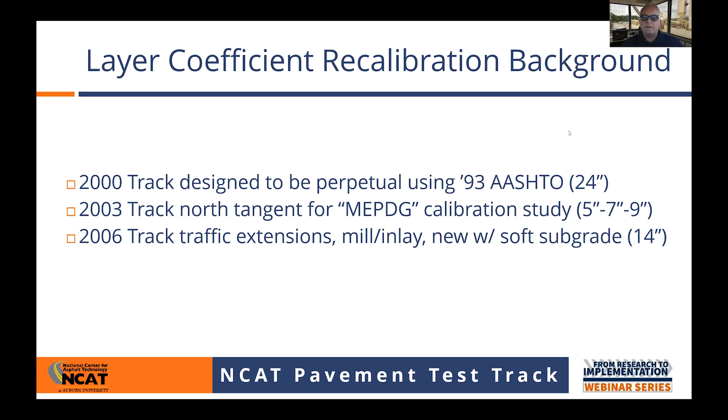In 2006, we did some traffic extensions in some of those sections from the '03 track. We did some mill and inlay sections, and then we also added a couple of soft subgrade sections, a 10-inch section and a 14-inch section that I think Dave is going to include in his comments for today.

In 2009, we did what we call the group experiment, where we did 50% RAP sections compared to virgin sections, warm mix asphalt, and a highly polymer modified binder.

Essentially what we learned over the course of building all these test sections was that, although the track was designed to be perpetual using the 93 AASHTO design guide and the layer coefficients in play at the time, 9 inches of thickness we later learned provided perpetual performance. Later, with innovative material like highly polymer modified binder, 5 and 3/4 inches provided what we believe to be perpetual pavement performance. So there's a lot of room for improvement and still be conservative with pavement thickness design.

And Dave, I'm going to hand off to you there so that you can get into the weeds on the research we've done with layer coefficients. And I got to figure out how to stop my share.

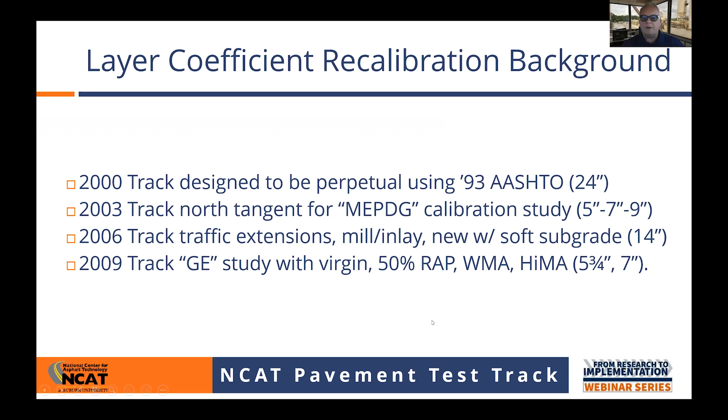All right, thank you, Buzz. Hopefully, Buzz, can you hear me? Yes, sir. All right, very good. I've got my slides up, so I think we're good here. I just got to rearrange a few other things.

Good morning, everybody. Thank you for being here. We appreciate your time and attention this morning. Buzz did a great job of setting me up for what I'll be talking about, which is recalibrating the asphalt layer coefficient, specifically at the NCAT test track.

And then I'll hand off to Kim to talk about similar but different work that was done in Washington State to achieve the same objective, which was to update how we go about designing asphalt pavements with the older 93 AASHTO design guide.

Many states — I think currently over half of the U.S. state DOTs — currently use the AASHTO 93 design guide, even though we have the new MEPDG and the AASHTOware Pavement ME software and so on. Most states are continuing to use the old AASHTO 93 design guide for a number of reasons I don't have time to go into here, but it's still very prevalent and commonly used. Even states using the newer design system are oftentimes also using the AASHTO 93. As part of that, the structure coefficients, what we call these A-sub-i terms, are key inputs.

This is how we express the relative strength of the various layers. I'm going to focus today on structure coefficient of asphalt concrete, but it's how we express the relative strength of the base, sub-base, and so on, all the various materials that we might put into a flexible pavement structure. And it's really important because the structure coefficients are how we get to layer thicknesses.

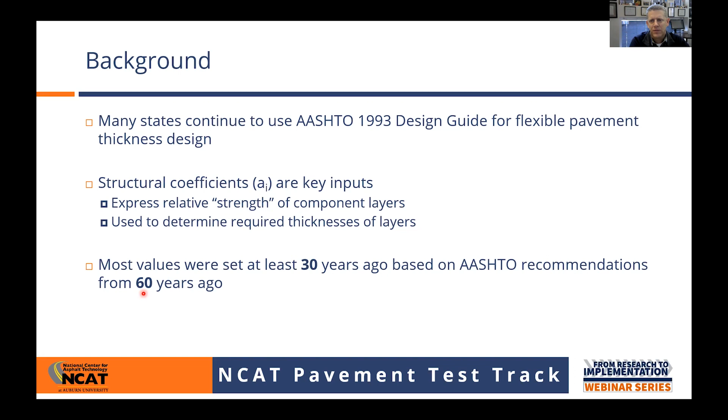Hopefully we would all agree that there's been at least a few improvements in how we specify and engineer our binders, our materials, and mix design and construction, all that kind of rolled together. When we use really old values from the 1960s, we're saying, well, forget about all that. We're just going to attribute the strength of the material to what was going on in the 1960s, as opposed to what we currently have in terms of our material design and engineering today.

So just a quick review for those that are unfamiliar with how structural coefficients work in pavement design. If we think about a pavement structure, we have, for example, asphalt concrete over aggregate base, maybe an aggregate subbase over the subgrade. Based on whatever the materials are, and say the modulus of the materials and other properties that we can characterize, we can quantify the structural coefficients, what we call A1 for layer 1, structural coefficient layer 2 and 3. We also may have a drainage coefficient assigned to each of these underlying base and subbase layers.

Through the AASHTO 93 design process, we can compute the structural number that is required above each layer to protect it. So in a design like this, we would have SN1, SN2, and SN3, and we would design it in a top-down fashion to come up with what the layer thicknesses ought to be.

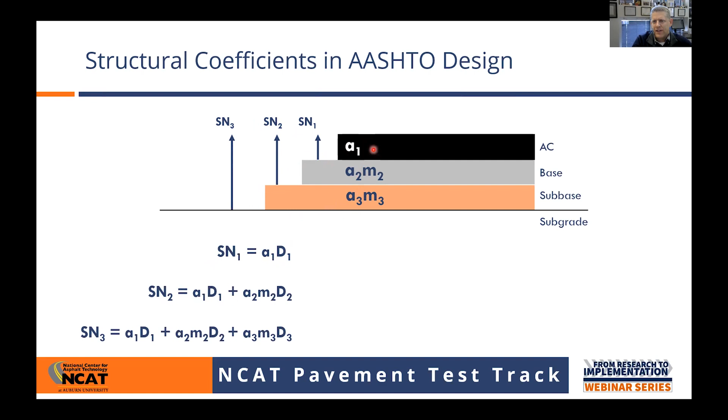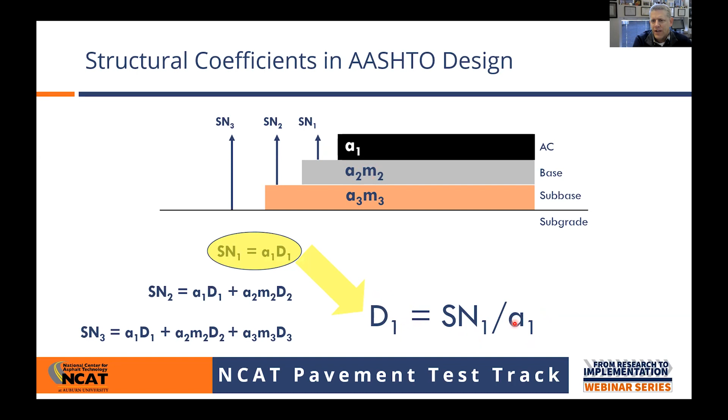For example, SN1 is just the product of A1 of that material times the thickness of the material. SN2 is the sum of these two layers, and then SN3 is all three together. So once we figure out what the required SNs are, we just have to back solve for the thickness. So for example, this equation, if I know what SN is required to protect the base layer, I just take SN1 divided by A1, and that provides the required layer thickness. So these structural coefficients are just critically important to how we go about coming up with the thickness of all of the layers, and the focus today is on the asphalt concrete.

So where do those SNs come from? Where do each of these SN1, 2, and 3 come from? Well, they come from this medieval torture device, the so-called AASHTO structural design equation. It's very complicated, and you can find nomographs like this to solve it in various textbooks and the AASHTO 93 design guide. It's a big empirical equation, and I'll break it down a little bit and talk about how we go about solving it, or the importance of the various parameters.

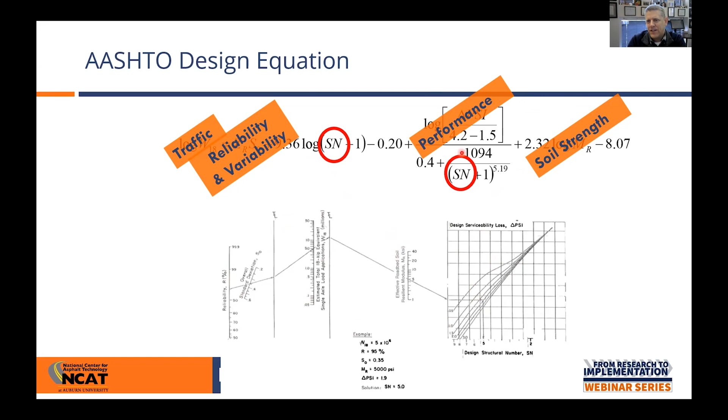Basically, if we characterize 5 inputs, and that includes the traffic, the reliability and variability, the performance expectation, and the soil modulus, those 5 inputs, we can then solve the equation for SN, and that's how we get to SN1, SN2, and SN3. One of the practical problems in using this equation is solving it for SN algebraically is nearly impossible. So what we have are nomographs like this, or we can program it into a spreadsheet and solve it numerically. But the point is, we put all this stuff into the equation, and what pops out is the required structural number.

And I think it's instructive to go back and look at or think about the AASHO road test that was held in the 1950s. These pictures were published in 1962. Before TRB was TRB, it was called the Highway Research Board.

These were published in the 1960s, showing some of the things going on at the AASHO road test. What's really interesting is when you look at the data that came out of that road test, they had structural coefficients ranging from 0.33 up to 0.83. These are average values representing that test loop and how many sections were in the loop, and the corresponding R squared. But it's really interesting that the values range from 0.33 to 0.83.

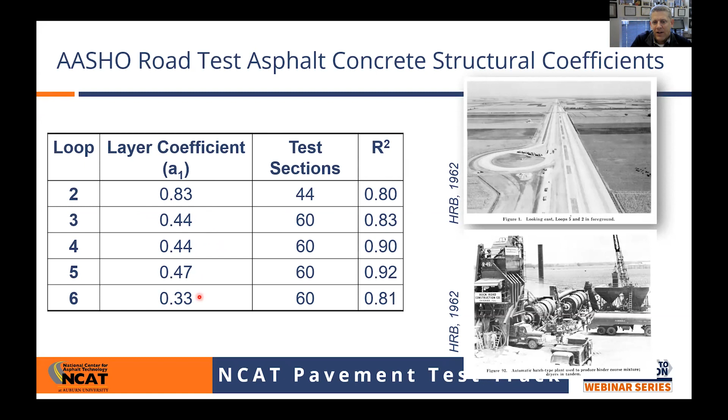There were 2 loops that came out at 0.44, and AASHO at that time decided they would recommend 0.44. As far as I can tell, reading between the lines, that is how we arrived at 0.44 virtually across the entire country. AASHTO said 0.44 is a representative number, and then it just migrated out to most every state. But the range of values was really from 0.33 up to 0.83.

And then there's two states, Alabama and Washington, and we're presenting about this today. Kim's going to talk about what's going on in Washington State, now using more than 0.44. That may be the first time in history that Alabama and Washington State were ever mentioned in the same sentence about some engineering technology. So we're in the same boat here, using above 0.44, and we're going to talk about how we got there and what the impact is on our pavement designs. Virtually the rest of the country, those using empirical design, are using 0.44 or below.

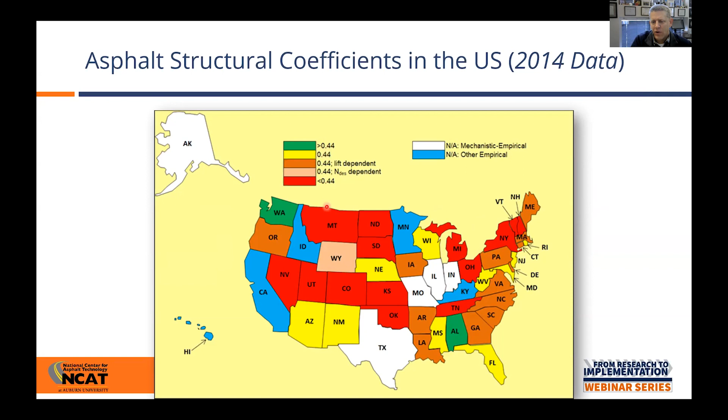Given the things I've talked about already and the new advances we've had in asphalt binder and mixture technology - if you think about the AASHTO road test, that was even pre-Marshall mix design, definitely pre-superpave. Marshall mix design didn't even exist yet. This was before we had SMAs and polymer modification, all the high-tech stuff and innovation that we find in the asphalt industry, which really didn't exist in the 1950s when those test sections were built.

So there's a need to update or recalibrate. We talk about updating, we're really talking about recalibrating the structural layer coefficient to reflect actual pavement performance. This report we wrote back in 2014, you can find it on the NCAT website. I've got a link at the end of my slides that goes through procedures. There's a variety of procedures you can go through to recalibrate, and I'm going to talk about one of them using our test track data today. But this document, if you're interested in getting into a lot more detail, is freely available on the NCAT website.

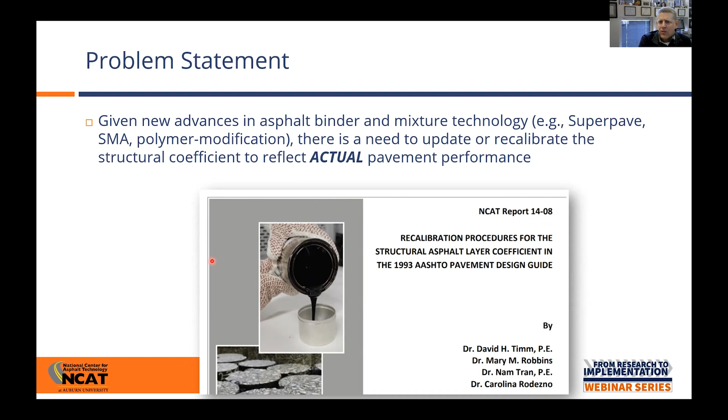The three different processes you can go through to recalibrate range from relatively simple to relatively complex. The first is using a deflection-based procedure. You go out to an existing test section, hit it with an FWD, do some back calculation, and then correlate the back calculated properties to structural coefficients using old regression equations that came out of the AASHTO road test. The problem with this approach is that it relies on those 1960s AASHTO correlations. This is probably the fastest and simplest way to do it, but it also doesn't provide you modern performance benefits in terms of the calibration process.

The process I'm going to talk about is performance-based procedures, where you recalibrate the structural coefficient to observed pavement performance. This is really closest to what was done during the AASHTO road test - how they came up with those values, the 0.33 to the 0.44, came out of the AASHTO road test by just calibrating the structural coefficients to observed performance. I'm going to focus on that, what we did at the test track. And then the more modern approach is to use mechanistic empirical based procedures.

And this is what Kim will be talking about, what was done in Washington State.

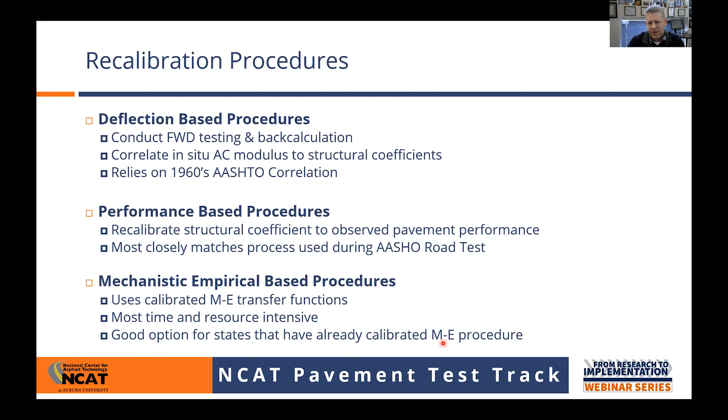Basically it uses calibrated ME transfer functions. It is the most time and resource intensive approach, but if your state is going through an ME implementation, at the same time you can go back and look at the existing performance of your pavement sections and calibrate using this more modern approach. It's a good option if you've already calibrated the ME procedure and have the necessary data, or if you're in the process of doing it, you can recalibrate the structural coefficient very quickly.

Buzz has already talked about the test track, so I'm not going to go into any more details other than to say that we really rely on this rapid application of traffic and weekly performance measurement to go through our calibration procedure.

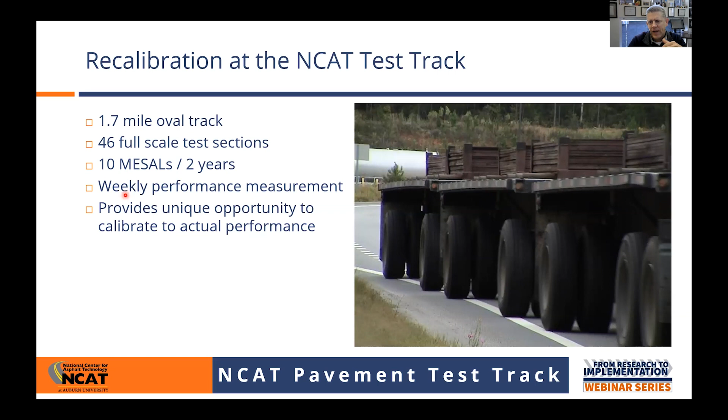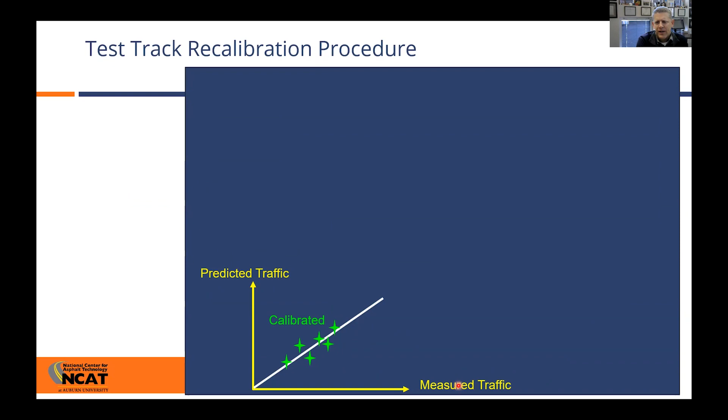The overall framework of how we recalibrated at the test track hinges on this idea that we have predicted traffic in terms of ESALs and then measured traffic. In an uncalibrated mode, you might not have a good match between those - there might be a bias in the data. In fact, this is what we found at the test track: we were able to apply a lot more traffic than what AASHTO 93 would predict using our existing structural coefficients. So the idea is you go through this calibration process and take the bias out of the data, same thing we do with calibrating ME transfer functions.

That begins with having actual traffic - knowing how many trucks, how heavy the axles are, and how many repetitions we have - and then actual performance, characterized by weekly IRI measurement on the sections at the track. We correlate that IRI through an equation to get a serviceability index, that 0 to 5 scale that AASHTO likes. From that, we get a terminal serviceability and a change in serviceability, important to the AASHTO equation. Then we're looking to come up with a new A1 that'll calibrate or take the bias and error out of our data set, and we can use that to calculate a structural number.

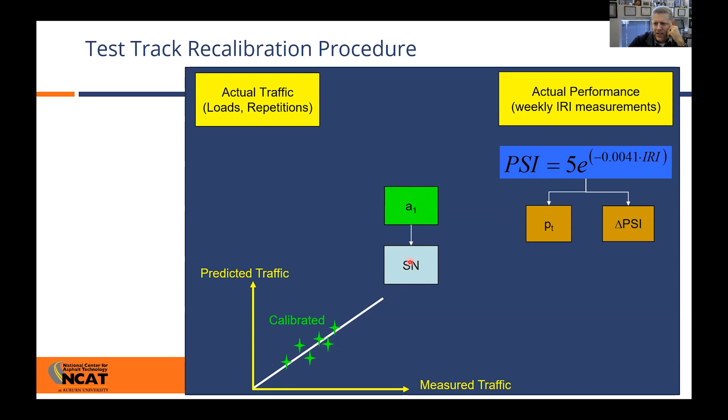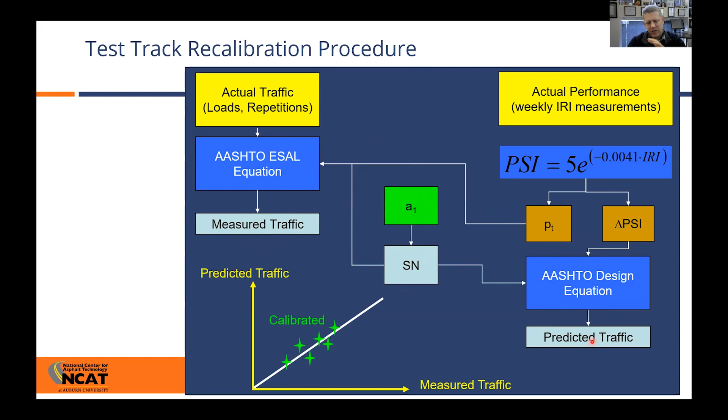That can feed into that long equation I showed earlier to give us the predicted traffic, the predicted log W18. There's another long equation used to calculate how many ESALs based on all this other stuff, and that's where we get our measured traffic. Then it's a matter of adjusting A1 to get a good match between measured and predicted traffic - we're just trying to calibrate that equation by adjusting A1.

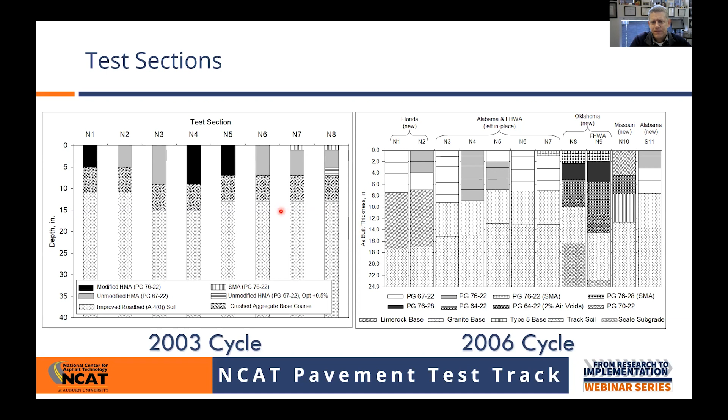This shows the sections used in our original calibration study. They span two different test cycles. I'm not going into all the details, except to say they had mostly the same kind of pavement foundation, though a couple sections had an imported foundation, a weaker subgrade, various aggregate base materials, various AC thicknesses, and various mix designs. It was a nice range of asphalt materials, representing what we'd call modern - although now it's 20 years old - definitely a lot more modern than the 1950s.

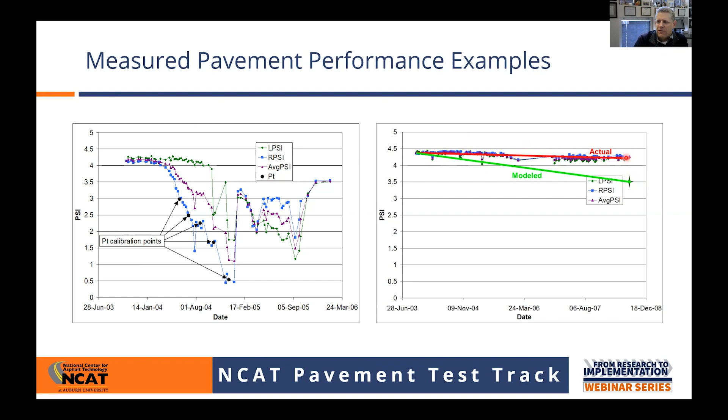What we did was convert the measured IRI to a PSI serviceability index on the 0 to 5 scale. This shows a couple examples. In some cases, we had a lot of pavement distress appear, so serviceability drops off, and we choose some calibration points. In other cases, we didn't have much change in serviceability. This red line is the actual, but to be conservative, we just chose a reasonably low value rather than the actual, since we couldn't calibrate without a change in pavement performance. So we chose that in some cases.

This is just showing some raw data. If we use 0.44 and look at predicted versus measured, the difference, the error - you can see using 0.44 for this example, we have a lot of error, a very poor match.

We have a lot more measured ESALs than predicted. We go through the calibration process and get a much better R² value. We get a much improved, still not perfect because of random error, but a much lower amount of error and a better structural coefficient to predict the actual pavement performance from our data sets.

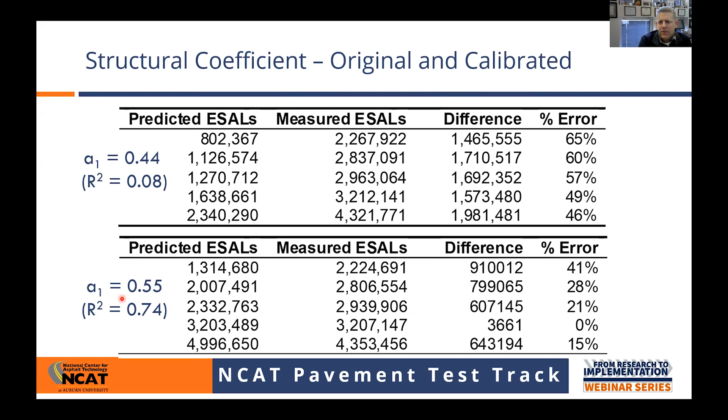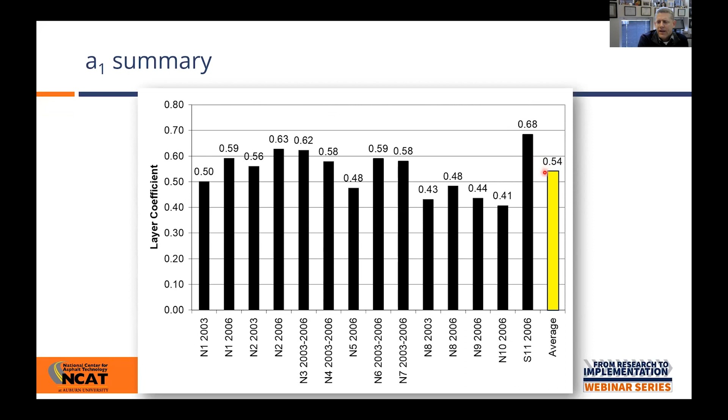This plot shows layer coefficients for all these various test sections. You'll notice they range from about 0.41 on the low end up to about 0.68 on the high end, within the range of the original AASHTO road test. We averaged these out and came up with 0.54.

That's what we recommended to ALDOT. As a further evaluation and justification for this, we also went back to the more simple method where we just run some FWD tests, back calculate, and come up with an estimate of the modulus. Some of you may be familiar with this correlation chart.

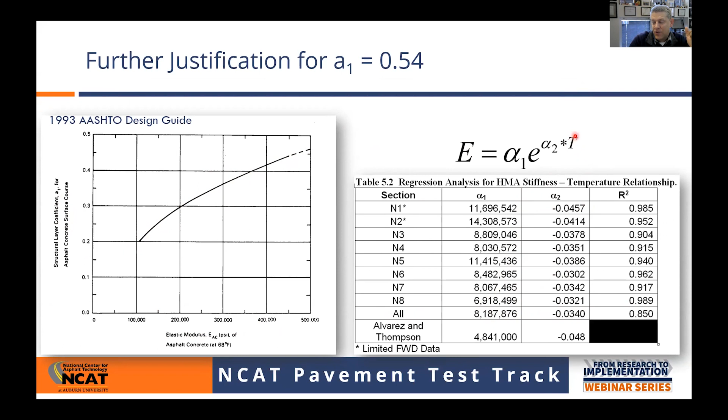This is in the AASHTO design guide, structural coefficient versus AC modulus. If you look at all of our test sections and take this bottom equation, put in 68 degrees, the AASHTO reference temperature, what you get is an estimated modulus of about 800 something thousand.

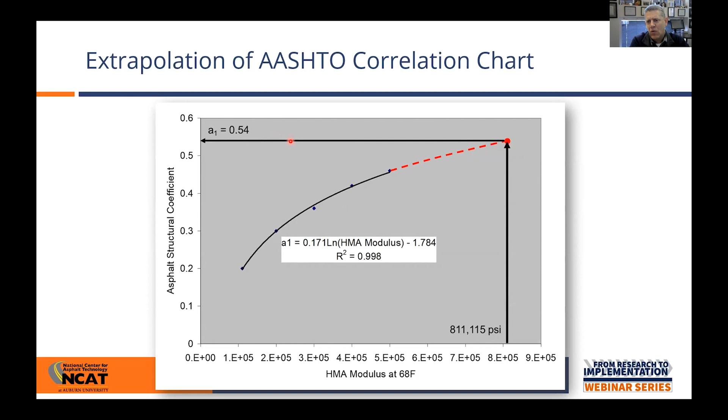Quite miraculously, if you extend that curve, which came from the previous plot, and extrapolate it out to what we have for our materials, what we come up with is a structural coefficient of 0.54. As a researcher trying to establish credibility, I would have really loved for this to come out at 0.53 or 0.55, not exactly 0.54. It looks a little suspicious, I know, but that's what we got. That's what we reported. So that was a good verification of what we got through the performance calibration.

We did some additional validation work on a more recent test cycle. Buzz mentioned the 2009 cycle where we had some high RAP percentages, 50% RAP, hot and warm mix. We had a section with OGFC, and some different types of warm mix on the track during this test cycle.

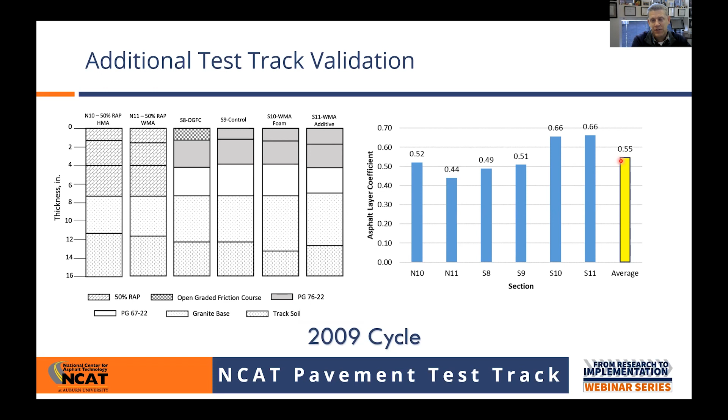We went through the same calibration process, a totally new set of data, and what we came up with here was 0.55. Our recommendation to ALDOT was to not change the 0.54 that they had already adopted, that this was just another validation and verification of the earlier calibration, the first one that we did.

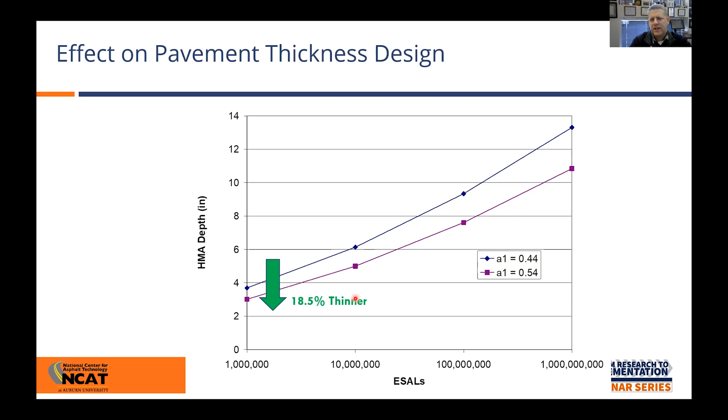So what does this mean in terms of pavement design? The beauty of recommending a different and higher structural coefficient is that it's a percent reduction. If you do the math, it works out to about an 18.5% reduction in pavement thickness. If it's a relatively thin pavement, there's not a lot of change, but in high traffic situations with high ESAL numbers, you may be shaving off 2 or 3 inches from the pavement section. So it's a scaled thing where the thicker the pavement is, the more savings you realize.

From an implementation standpoint, at NCAT what we're always striving to do is have implementable results, and this is a really good example of very rapid implementation. We finished the report in 2009, provided it to our DOT, they reviewed it and gave us feedback. Then in September 2009, Federal Highways and ALDOT signed off on making the change from 0.44 to 0.54. You see it noted here and here.

The way they implemented this was very straightforward: when you're using the Darwin software with AASHTO 93, just change that asphalt structural coefficient from 0.44 to 0.54. The net result, we've been told by ALDOT, is about a $20 million a year savings by making this change. The change has been in effect now since 2009, and they have not reported any ill effects or unintended consequences of making that change.

They simply have calibrated the performance equation and the design equation to better reflect the performance they're getting out of their materials locally, and that has been a very positive change for us. It's a way to spread the paving dollar a lot further. So to wrap up my portion, new advances in mix design technology really warrant this. When I talk to folks about this, I encourage them to think about the types of materials they have and whether they should go through a calibration process.

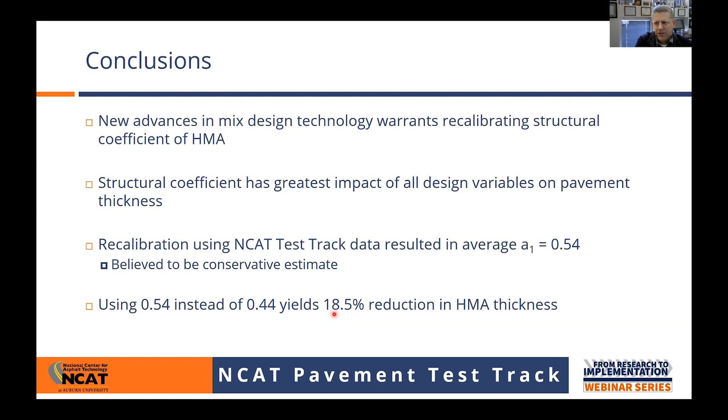And really the impact here is this 18.5% reduction in thickness. That is a very significant impact for our state DOT in terms of dollars and how far they can make their tonnage go. Just a couple of references here.

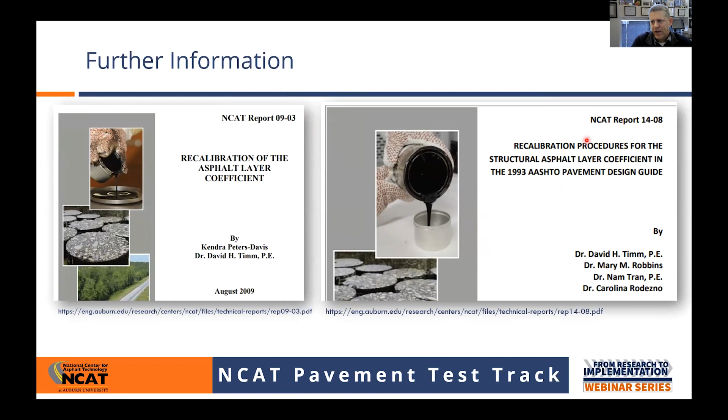I think it's being recorded and Travis will make this available. But if you just go to ncat.us, you can find these publications on recalibration. This is the report, and then how we recalibrated, which is more of an overview of how you can go about recalibrating.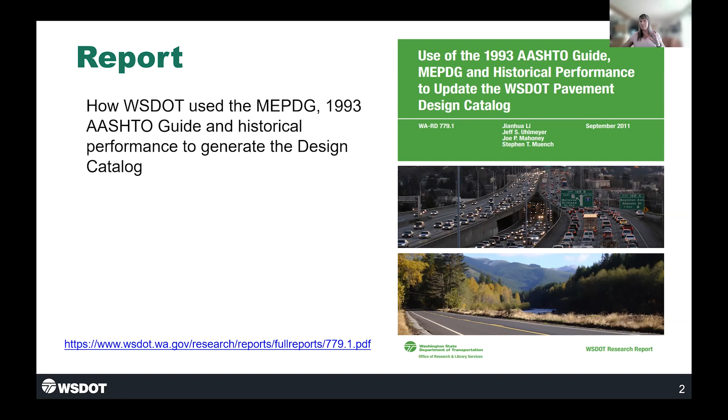So I'm going to get rid of this so it's not in my way. We have a report out there as well, 2011, like I said, directly after NCAT did their work and Alabama DOT took over. I do have links in here if people are interested, but this presentation is just a summary of this report.

So what we did is we used the MEPDG, it was the MEPDG back then. And we wanted to check what we were getting compared to the 93 AASHTO guide at all different ESAL levels. So that's really what we did.

Part of the effort that we went through for this calibration was to attempt to match the MEPDG outputs with our field performance. We've always had, dating back to the 50s and 60s, some really smart people at the DOT designing things that were perpetual, even though we didn't know what perpetual pavements really meant back then.

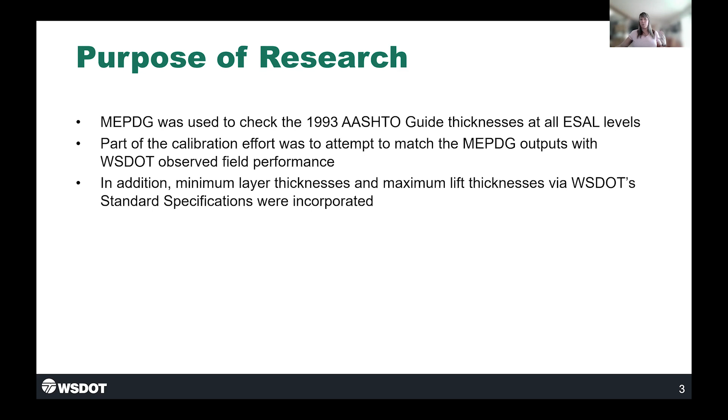So we had a lot of really good information and really good field performance out of our pavements for many years. The other thing we wanted to do is look at minimum layer thicknesses and maximum lift thicknesses for our standard specifications. They were all incorporated into this so that we weren't making messes of what layers and thicknesses should be. So we kept that in the back of our mind when doing the rest of this stuff.

Our pavement policy, the most recent is September 2018, but it is out there at the link you see below. What you will see is basically a design catalog that is in our pavement policy, and that is what we reference our regions to. We have 6 regions within the state.

They design to the catalog first. If it doesn't quite fit, or if they have some specific data like different subgrade resilient modulus data or different drainage issues or different things like that, then we would go to the 93 guide. That's our backup to the catalog.

Our backup might be the Pavement ME, but we actually don't even have a license at this point in Washington. So we mainly use the design catalog that you'll see at the end of this presentation, and then we use AASHTO 93.

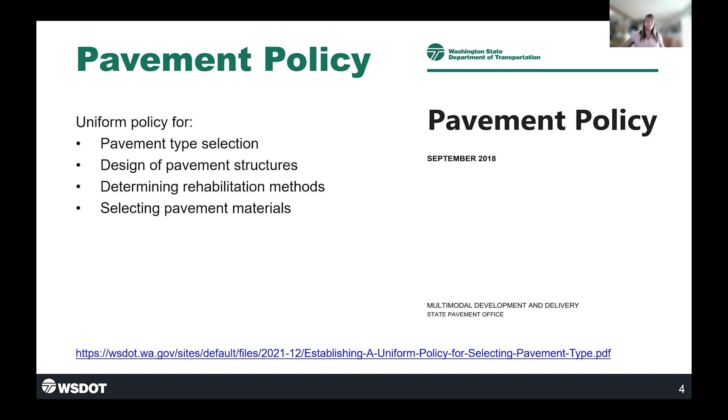Just want to touch a little bit on our pavement management system. It was a system made in-house many years ago, back in the 80s, and it's morphed many times over the years, but it's got a lot of great, valuable information. One of the biggest things is we have the construction history in our pavement management system from initial construction. It's not perfect, but it's really, really close, and we do still take cores to check different things.

We do have a really good history of our pavements, so we wanted to take that historical data and historical performance into account when we did this recalibration process. This is just two tidbits of many, many things in our pavement management system, basically the pavement thicknesses, and distress details down here, but we've got a ton of information we wanted to take advantage of.

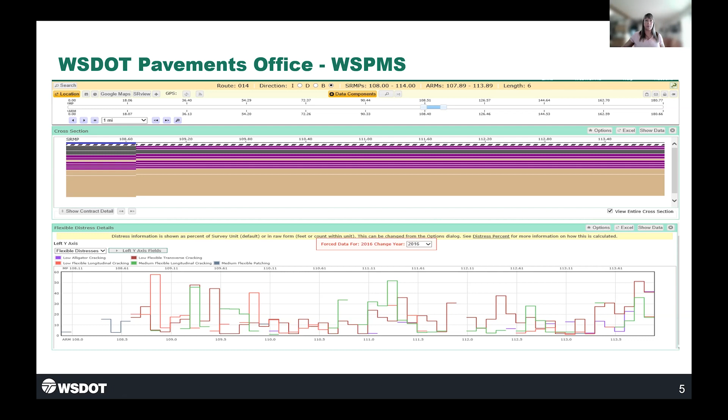So what we did is we used, like I said, it was the MEPDG back then. The versions that we had already used and that we had available to us was version 0.6 for rigid, which I'm not going to talk much about, but I wanted to at least make that point here because these slides get used everywhere.

And the flexible portion was version 1.0 in 2008. Some of the design considerations that we design in Washington for 50 years, that's our design life for both types of pavement.

It doesn't matter, we basically took our traffic levels and expressed them in ESALs because that was a little bit easier for the pavement designer to understand than traffic load spectra, but we actually converted it into load spectra. We took WIM data and all that kind of stuff. So we did what we needed to do, but basically we're expressing everything in ESALs when you see the charts.

The base type that we typically use is a granular base, what we call a crushed surfacing base course, except for our PCCP with higher ESALs, we wanted to stay away from that because we had some issues with it in the past. As I said, the thickness we based mainly on constructability and our minimum and maximum layer thicknesses and things like that.

So we did a couple of assumptions so that we could get the right thicknesses for the pavement structure itself. Our subgrade soils, basically what our design catalog is based around is a resilient modulus of about 10,000 PSI. We found that that's pretty average and actually a little bit low on the conservative side for Washington State, except for in a few areas where we've got really some polluted soils and stuff like that. But overall, 10,000 is pretty conservative.

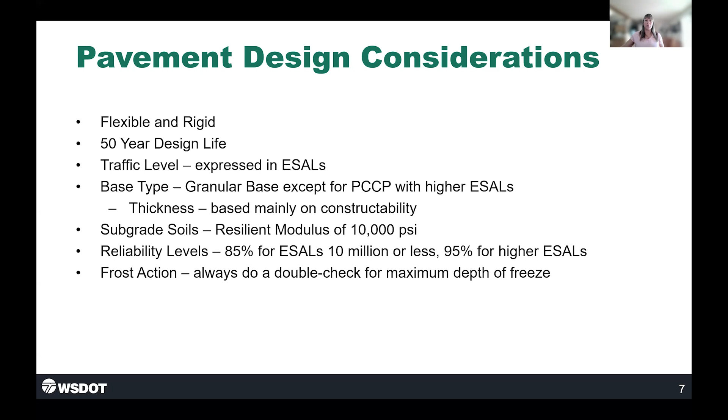So when we use the 93 guide, some of the specifics that Dave walked through, your serviceability indexes, we set to 1.5. We did a combined standard error for traffic of 0.5. That's our standard that we've used forever, and we decided that's one thing we wanted to stick to. At the time, our layer coefficients for HMA were 0.44, and you'll see where we've changed that, and our gravel base was 0.13.

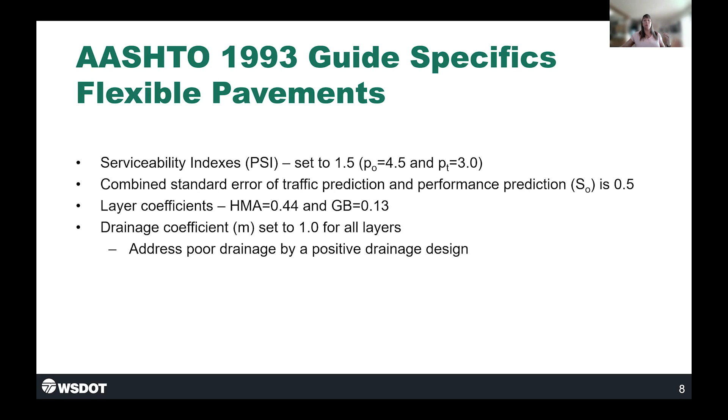Typically for drainage, we design positive drainage any way we can, just because we'd rather get the water out of a pavement structure. So we set it to 1.0 for all of our layers, and that's what our catalog is built on. But if we have something where we can't design it that way, then we would look at a redesign with changing our drainage coefficients.

One of the things we were thinking about when we did this work was life cycle cost analysis as well, and what was reasonable for Washington State based on our data and historical performance. So I throw that in, but I'm not going to talk about it.

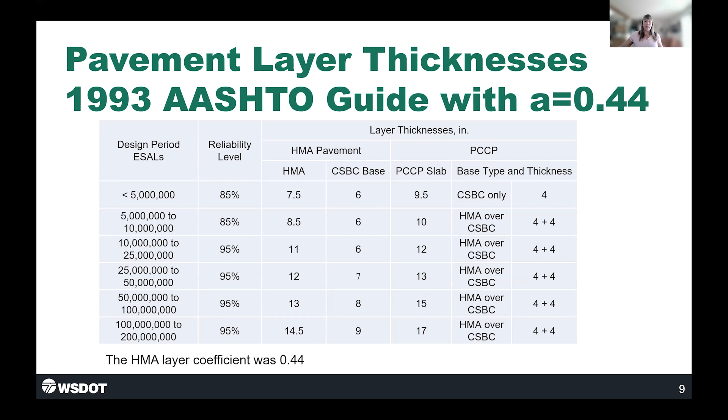So what we did is we went through the MEPDG, and like I said, we took the traffic with the WIM station data, load spectra, and all that kind of stuff. We did adjustments for the traffic volume. We looked at all the different vehicle class distributions, axle loads, AADTT, the truck traffic growth rates, all of that from historical data.

So we took as much as we could from the data that we had, but we didn't have that specific test track data like NCAT had. So it was great to have something a little bit different, but yet following sort of the same thought process that NCAT had.

Climate, we found that our default climate data from the weather stations in Washington was fairly accurate, so that's what we used. And then we actually went back to our design files, materials testing, standard specs, all that kind of stuff to look at our material and structural properties to make sure those made sense for those MEPDG inputs.

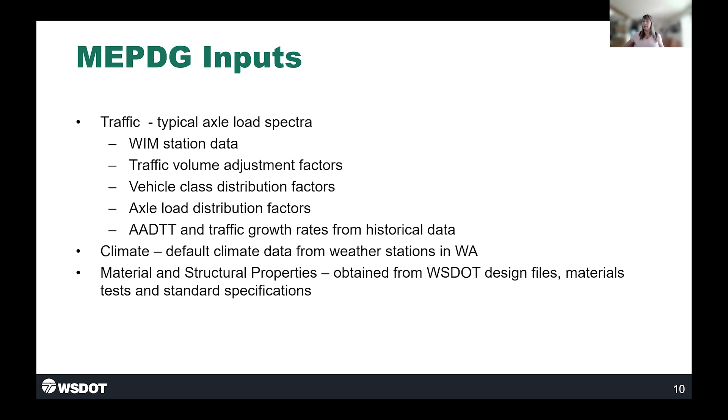So for HMA pavement conditions, the things we used to figure out the pavement distresses was, like I said, a 50-year life total, but with proper rehab strategies. So we based that on our pavement design results and performance. Typically we would get a pavement surface life anywhere from 12 to 16 years.

Recall that I talked a little bit about Western Washington versus Eastern Washington. We do have a very big difference between those two in weather and different conditions with traffic as well. So we typically would get anywhere from 12 to 13 years on the east side, about 16 years on the west side. So we decided to just use 16 years for our surface life there.

So that does come into play when we were talking about doing our MEPDG distress data. The terminal conditions we used was IRI of 220 inches per mile, which might be a little bit higher than what you guys are used to seeing. FHWA, of course, uses 170. We've always used 220, and it's typically a trailing factor for us anyways. We usually trigger our distresses with cracking or rutting way before we get there with IRI, so we don't really worry about that, but we did use 220.

Longitudinal cracking of 1,000 feet per mile, fatigue cracking of 50%, transverse cracking of 1,000 feet per mile, and permanent deformation of 1/2 inch.

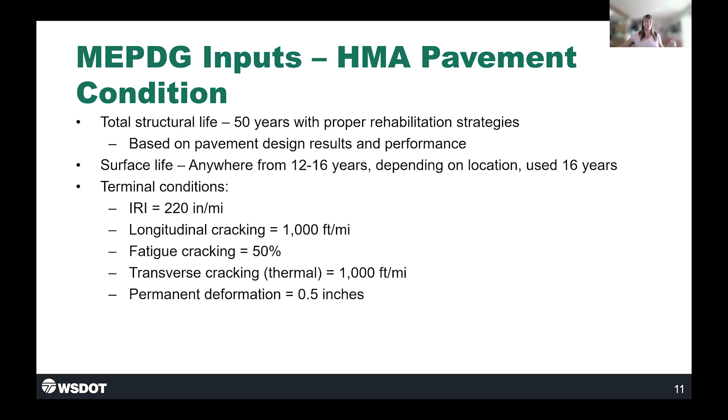So when we recalibrated the MEPDG, remember that I said we used version 1.0 in 2008, we actually had to do a little bit of recalibration since then. What we did is we compared the model outputs with our historical pavement performance based on that guide that was the recommended practice for local calibration. That was a guide from one of the NCHRP reports that came out when they were originally doing the MEPDG and how to go about that. So we actually followed that guide to get our model outputs.

Our typical calibration sections, traffic levels, again, used a 50-year design ESALs.

We did use subgrade resilient moduli of 20,000, 10,000, and 5,000. That's typically the spread we see in Washington. 10,000 is conservative but pretty typical across Washington state. Some of those Palouse soils we'd see get down around the 5,000 to 7,000 PSI range, and we do have some that approach 20,000 or more.

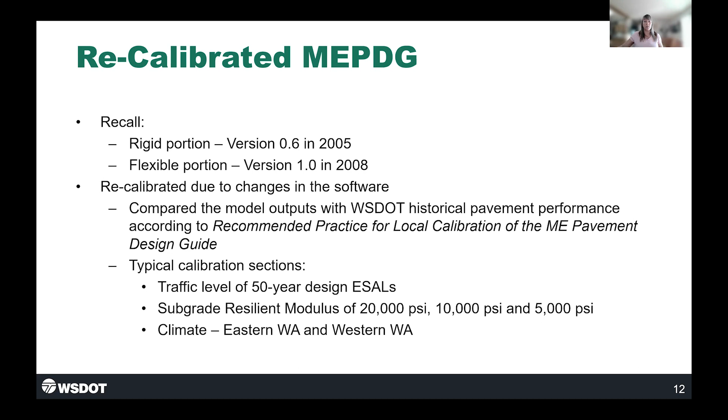Again, climate was Eastern Washington and Western Washington, because we have very different climates on both sides of the state. Our distress models for the MEPDG, the alligator cracking model, back then assumed bottom-up fatigue cracking. As I said, WSDOT has a really good history of our pavements and pavement performance.

We have a history of some thicker pavements, and we see a lot of top-down cracking. I actually have a link to the report in the notes of this slide when it gets published. We did a fairly thorough study about top-down cracking. What we see is that any of our HMA pavements about 6 inches or thicker, we see top-down cracking and not bottom-up cracking.

Which really goes to that whole over-design issue - are we over-designing with a 0.44 structural coefficient number? The MEPDG wasn't able to properly predict the type of cracking we were seeing, but the rate of cracking was reasonable, is what we saw. The progression of cracking was questionable for the MEPDG. It showed very different trends for different traffic loadings, so we weren't too confident in this model itself.

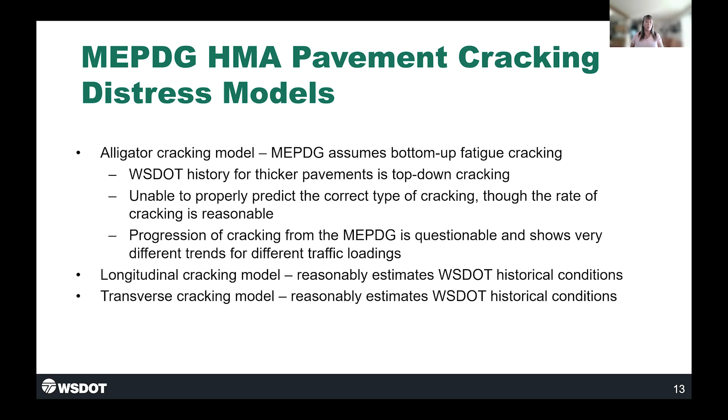The longitudinal and transverse cracking models, we felt, were fairly reasonable and matched our historical conditions. When we go to roughness, the rutting was calibrated for surface rutting only, because we have those thicker pavements and typically did not experience rutting in our base and subgrade layers. We have a lot of pavements that are HMA 6 inches or thicker, and when we see rutting, we usually can get rid of it with a mill and fill.

The roughness model couldn't be calibrated because the default model underestimated our roughness, so we just didn't use that model. It wasn't too big of a deal because that's usually a trailing trigger for us - we typically trigger on cracking or rutting way before we touch our rutting or roughness threshold. So basically the HMA pavement failures were defined by cracking and rutting only, and that matches our historical performance.

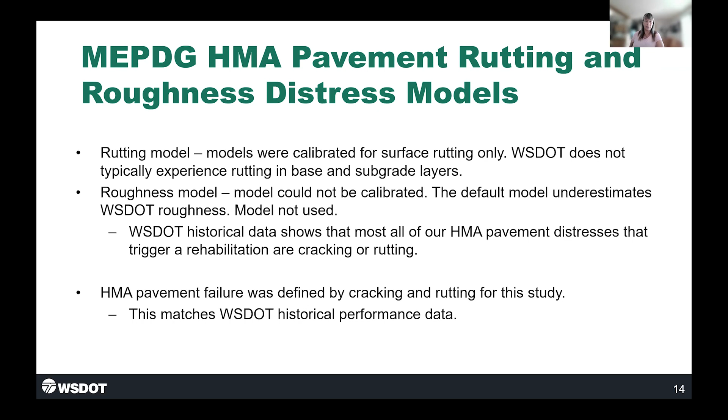So what we did is we compared it - I listed these again so you can see them in the same slide. We compared it to these conditions, and the 93 design guide values were used as the input values. The MEPDG recalibration results came closer to our historical performance than the 93 AASHTO guide with an HMA coefficient of 0.44. What we found is that the 93 AASHTO guide was producing overly thick pavement sections, especially for the higher ESAL levels. But again, that was at the 0.44.

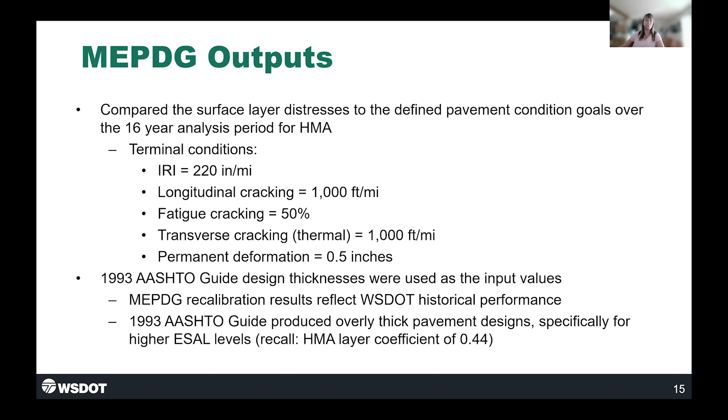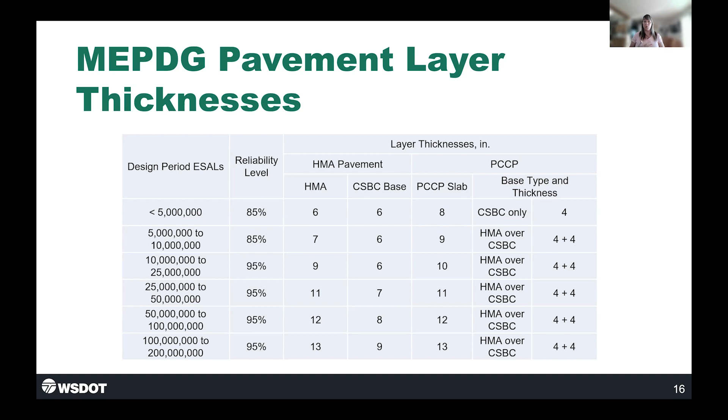We based a lot of our thought process on what we were seeing historically, because we didn't see a lot of pavement failures or a lot of quick pavement failures either. We had really good history and long life.

So some of the discussion here - we did some adjustments to the revised structural design thicknesses. HMA pavements averaged about 1.4 inches less than the 93 guide. For heavy traffic levels, HMA rutting predicted greater than half an inch. So what we did there is we chose to use higher binder grades, or potentially different types of mix like an SMA, for higher ESAL levels. That's part of our design process, and historical pavement performance played a huge factor in the final adjustments.

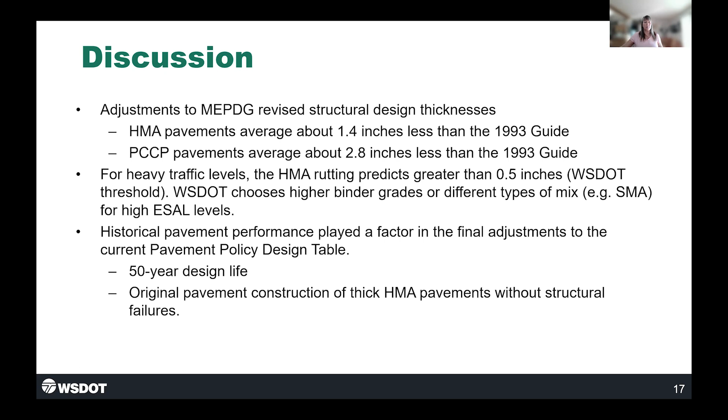Again, we designed to 50 years. I know a lot of states have lower design year lives, but we designed to 50, so we want to make sure it's perpetual, and that's what we're focused on. But we also thought that the 93 guide was being overly conservative. So our original pavement construction of our thick pavements, we didn't have structural failures.

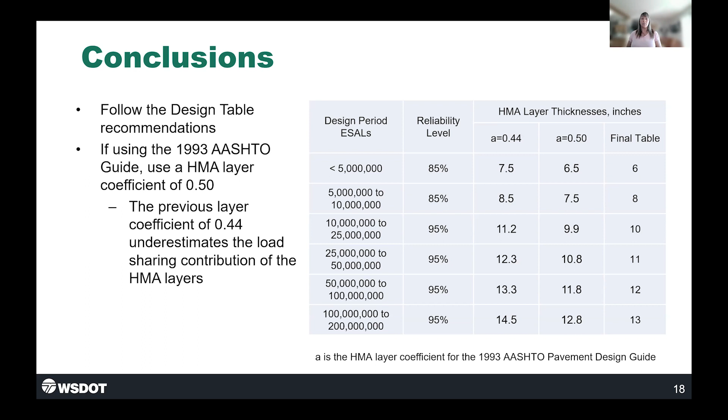Here's the chart. So the first one under the layer thicknesses is with a coefficient of 0.44. Our adjustment was to a 0.5. We didn't go quite as high as NCAT and Alabama DOT at 0.54, though I think there's definitely times we could, especially if you're using a polymer modification or something like that. We do think that the 0.5 is still conservative, takes into account a lot of different assumptions that go into everything, but we feel very comfortable being able to change it from the 0.44 to the 0.5.

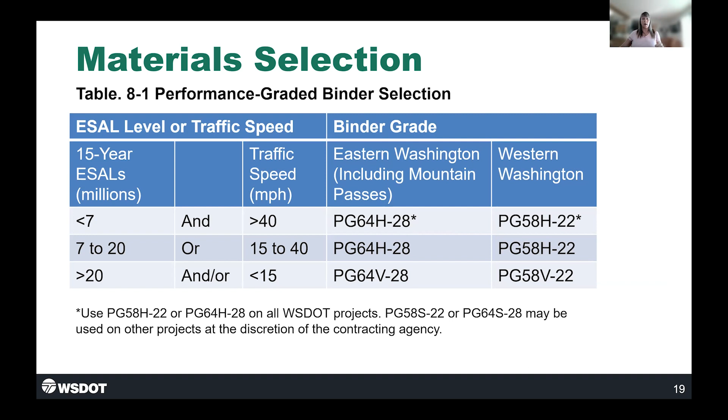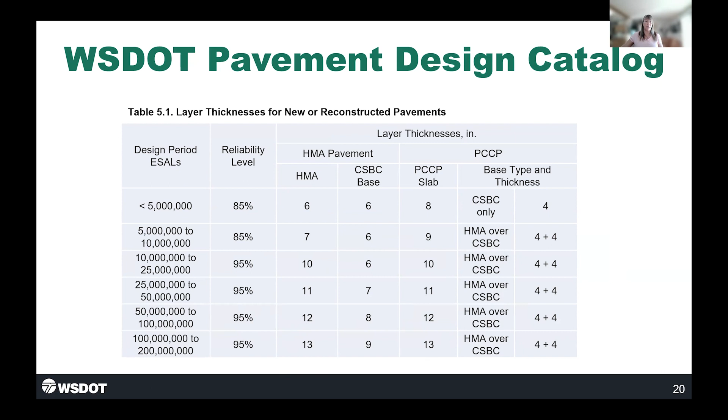I just threw this in here because, like I said, we do adjust binder grades for issues we may have with rutting. And this is what is in our pavement design catalog. Right now you can see the PCC is in there, but life cycle cost analysis definitely went into our considerations, thinking about what works historically in Washington and what the MEPDG gave us, as well as what AASHTO 93 gave us. And that's all I have. Hopefully I didn't go too long either.

I think that was perfect, Kim. Let's see if I can... Agreed, Kim, if you can unshare, that'll speed it up for Buzz. Okay, I paused share. How can I unshare? Why do I not have that? If you take the pause off. I did. No, that's just my video. All I have is a new share, and I don't want a new share. Thank you, sorry about that. You're okay, now I got to unshare. Got it, there you go, Buzz. All right, hey, as long as we get there, right? That's right, that's all that counts. That was a great job, Kim, and thanks, Dave. Can you see my takeaway screen, Travis?

Yes, sir, good deal. So from our perspective, we've used the test track here to prove performance in structural test sections, in mill and inlay test sections, and in pavement preservation. We like to say that we do research in 3 buckets: one in mix of materials, one in pavement thickness, and one in preservation. It's all about really putting the best mix of materials in each layer, then knowing how thick the structure needs to be, and then maintaining the surface in the most cost-effective way through preservation when you have perpetual performance.

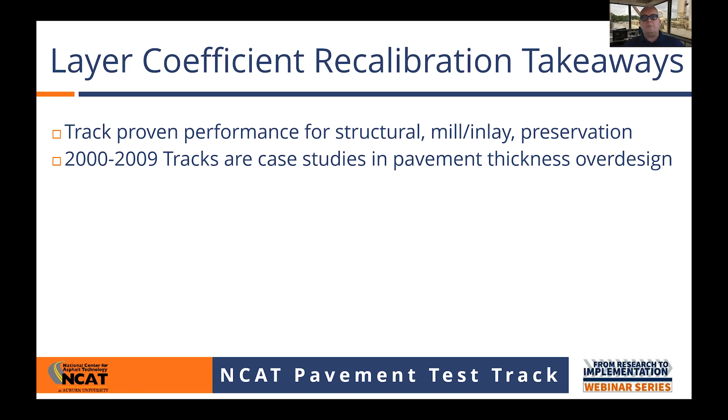So that's really 15 inches of asphalt that we need to invest in other places. We touched on this a little bit, but this 0.54 number is with conventional materials. In 2009, we did a thinner pavement that was 5 3/4 inches using HiMA binder, and this is not published information. Dave and I did some quick calculations on this, and a conservative number to use with highly polymer modified binder was 0.77. I say conservative because it never failed. We assumed that at the end of 20 million equivalent single axle loadings it would fail on the next lap, which is really kind of outrageously conservative. So that number, 0.77, is way bigger than both 0.44 and 0.54.

We think that the 0.54, based on everything we've seen, is still conservative for design. Kim mentioned their 0.50 they believed was still conservative. It's really reassuring for us as researchers that, with the effort done in Washington that Kim described, we have an independent, completely off-track corroboration with the research we've done, that the number needs to be significantly increased from 0.44. Not so that we can be a cowboy with our designs, but just to eliminate some of our excessive conservatism.

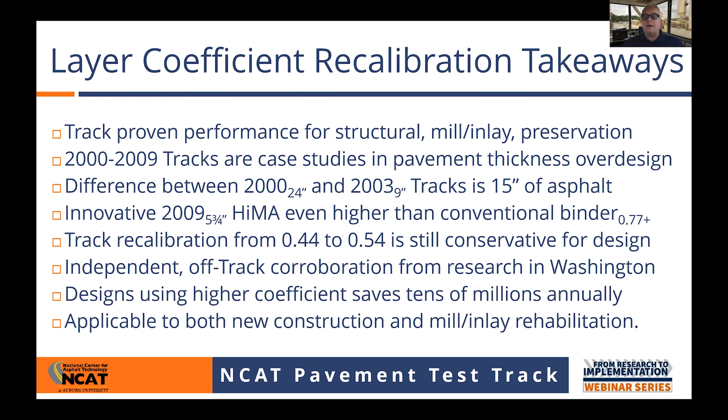As Dave mentioned in his presentation, in Alabama this saves tens of millions of dollars annually, and that money adds up. That's money you can redirect to other needs on the network. This increased number is applicable to both new construction, lane additions, and also mill and inlay rehabilitation.